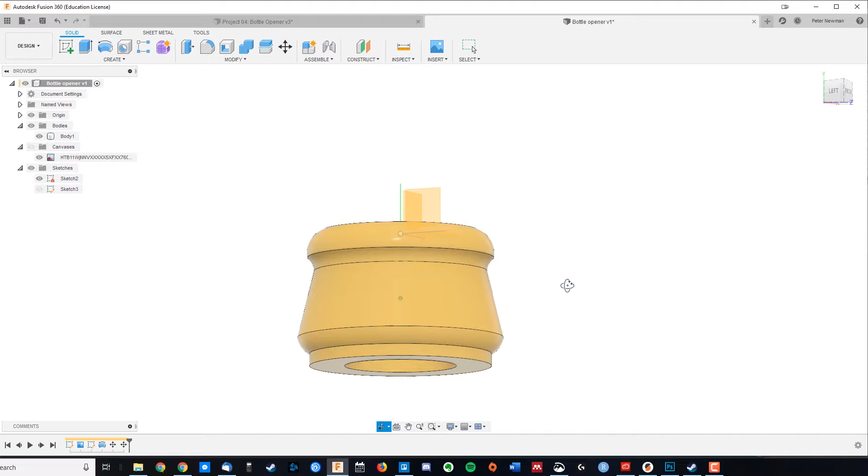Now we're ready to start the rest of my design. What I want is something to leverage at the top, some sort of handle, and some sort of slot for the 10-cent coin to go into.

So I'll come back to my bottle opener, and we're going to create a new sketch onto this back plane here. Now I can use this as a reference to vaguely map out what I want to do.

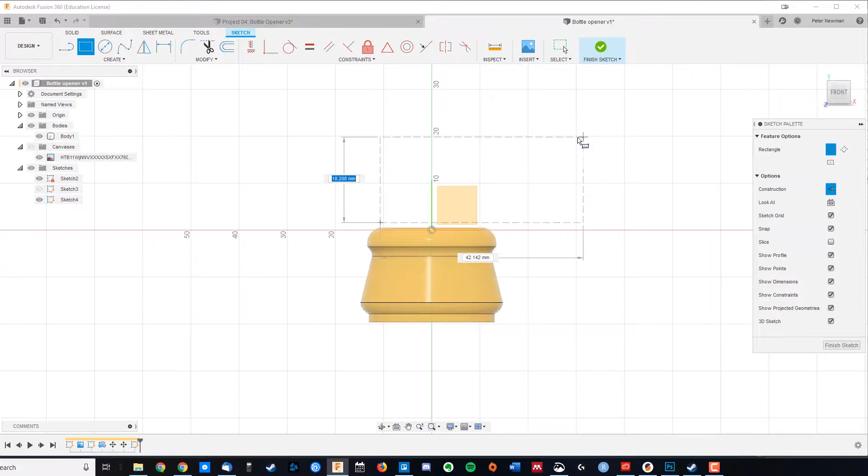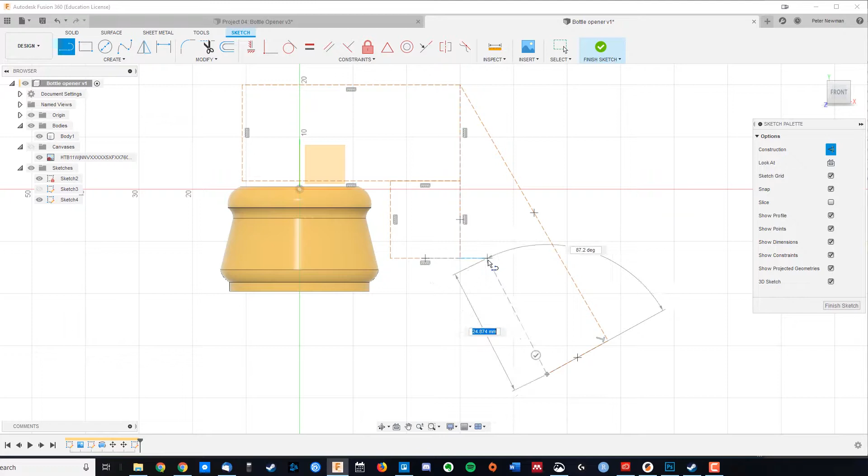Using construction lines, this is quite an organic way of doing things. I know I want something that's going to vaguely go up there, come over to here maybe, and then I need something for the 10-cent coin to go into, so maybe we just come down here. And then for the handle, I want it to kind of start maybe here and come down, maybe that far, get 90-degree turns everywhere, and maybe it just comes up to there. Looks alright, so it's going to look vaguely like that.

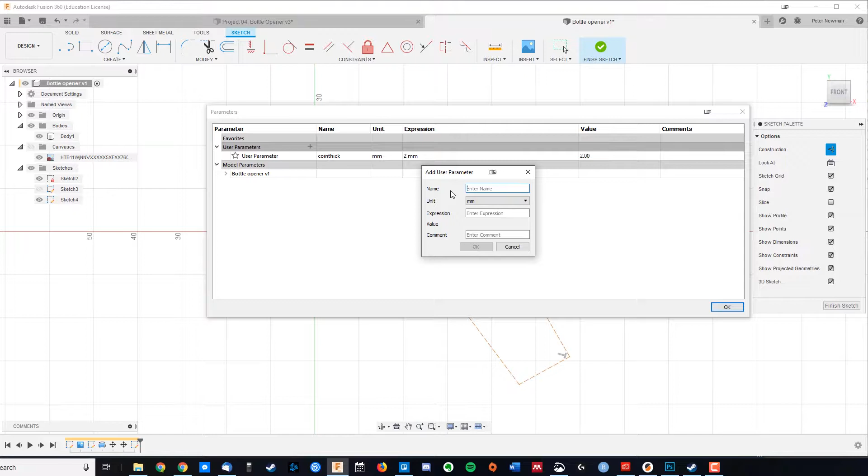I also know I need some sort of coin to go in there, so I'm going to come up here to modify, change parameters, and I know that the 10-cent coin is 2 mil thick, and I looked it up - coin diameter is 23.6 mil in diameter.

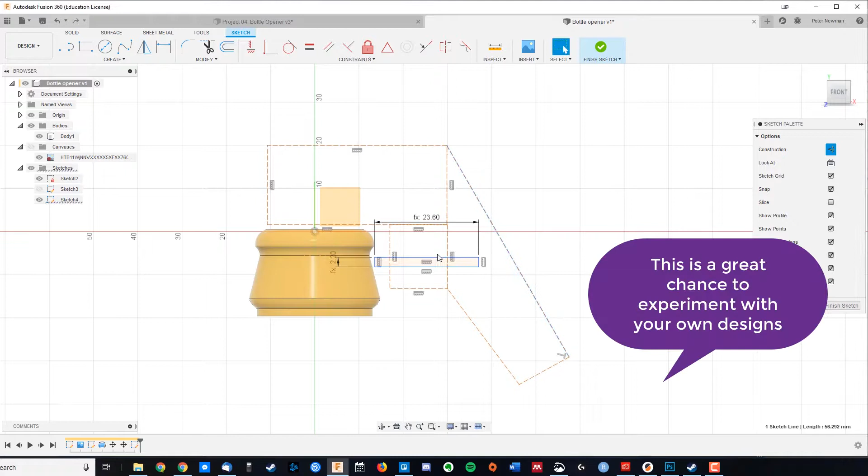So I'm going to draw in a rectangle because this is where it needs to go. I want coin thick there and coin diameter there. Might move it around - let's leave a little bit of tolerance. This is a really nice quick way of mocking up a sketch.

So now we're going to fill it out. We've got these lovely curves. The tool we use to make those curves is the spline tool. So, create spline, fit point spline.

And now I can basically just put in little handles here and there. Remembering it doesn't really matter how closely I fit to my dimensions here, but that initial curve was just to give me an idea of what it might look like.

Already you can see you've got these different handles that we can change the curve, and we can add more handles if you like. Hint: adding more handles makes it trickier. And why don't we make this not a construction, and finish it off here,

and up to here, and something like that, right?

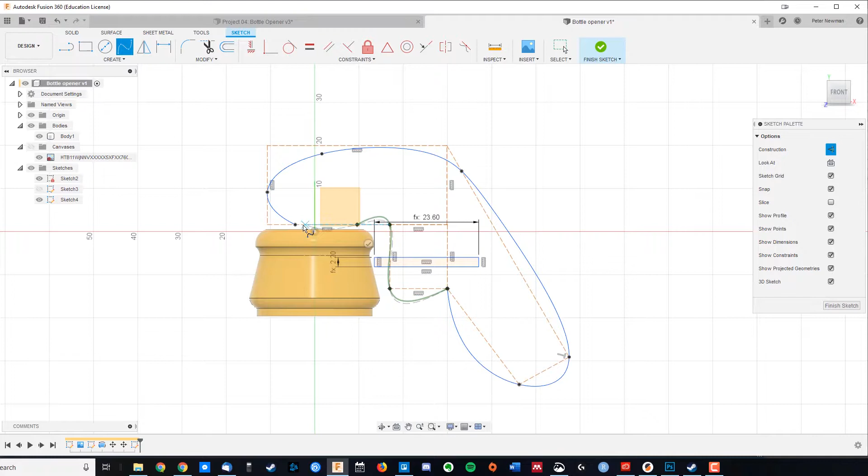And I might flatten these bits out because I know that's going to have to leverage off there. And look, I think that's looking okay. I'll just move these up here, give a bit more of a handle shape. And this doesn't have to be as far down. But you can decide what yours is going to look like all on your own.

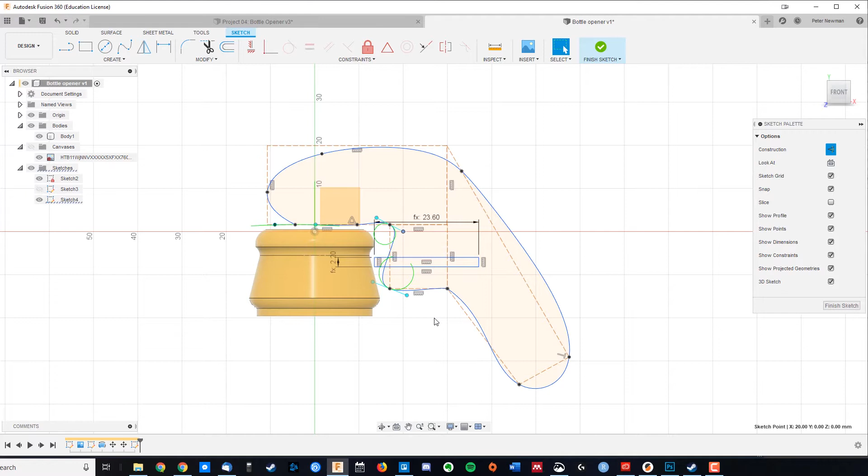And now we're going to extrude it out. In the past we've gone in one direction, this time we're going to go symmetric. I want it to come out so that it's a little bit more than the width of the bottle top, knowing of course that the coin's got to be 23.6 mil.

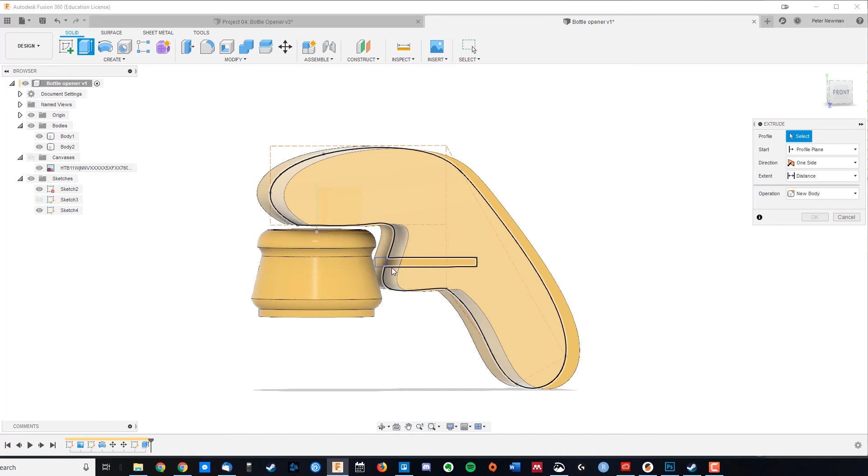The last step is to put back in that slot. So I'm going to come over here, turn my sketch back on, E for extrude, and we're going to come out to coin diameter on two, because of course we're going to go symmetric, and we'll add a bit of a tolerance there, and there we have it.

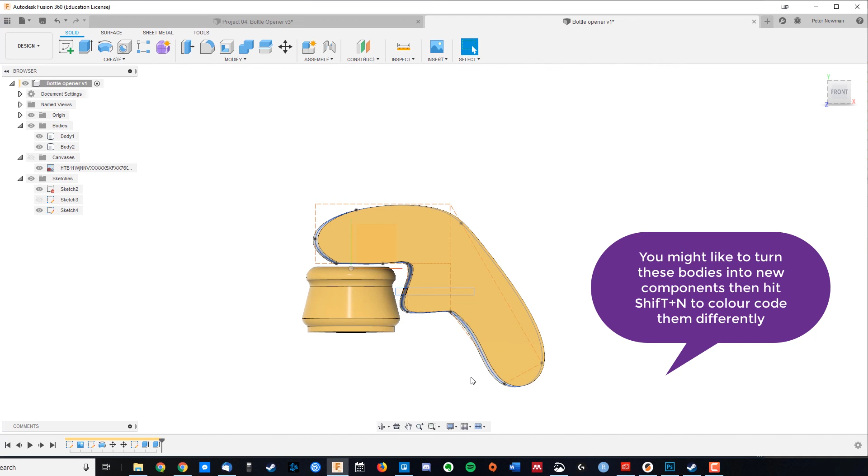Right, you've now got your own mixed material bottle opener, done with splines, and using a reference made from a canvas.